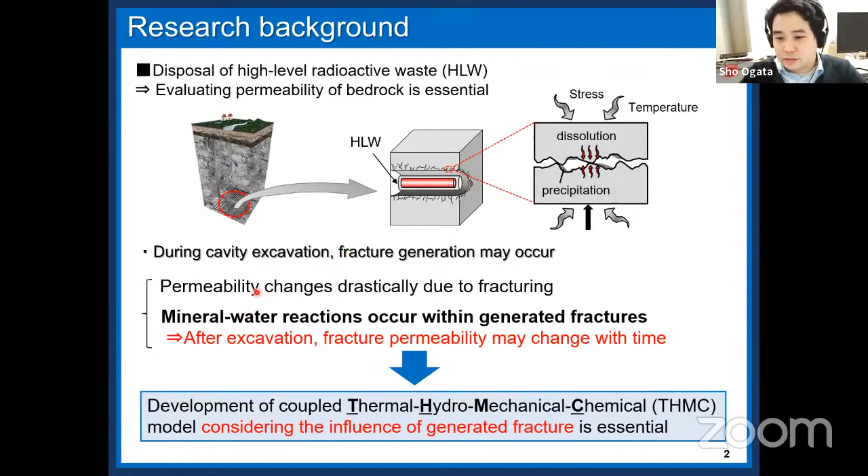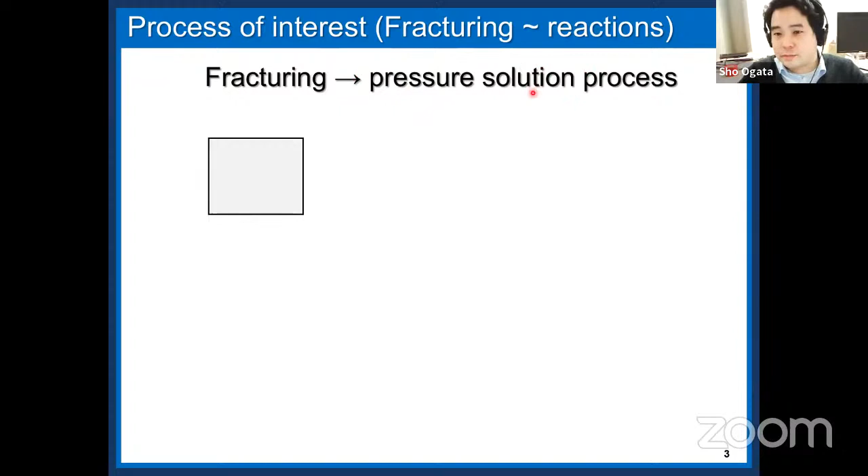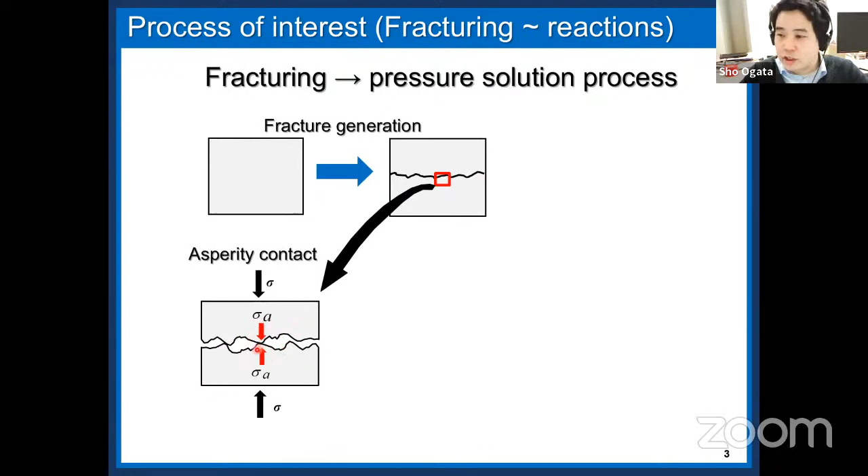Let me explain the process of particular interest in this study: a series of processes from fracturing to subsequent occurrence of mineral reaction. Among mineral reactions, pressure solution is introduced here. As shown in this figure, at first, a fracture area is generated due to cracking. After that, when high compressive stress acts on the rock, mineral dissolution occurs at asperity contact points in the rock fracture, and the fracture is gradually compacted by mineral dissolution over time. This phenomenon is pressure solution. When pressure solution occurs continuously, the fracture aperture decreases with time, as well as the permeability.

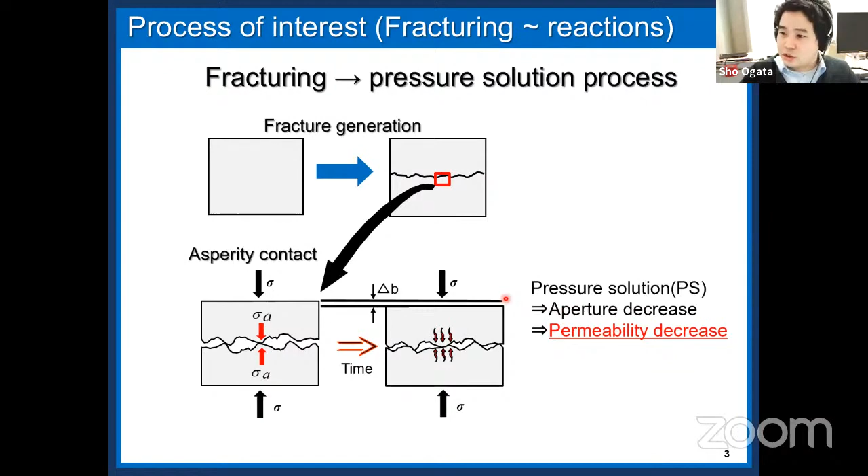So, for accurately predicting a series of permeability evolution processes during the geological disposal period of radioactive waste, the series of processes from fracture generation to subsequent pressure solution within generated fractures should be modeled and incorporated into the coupled THMC model.

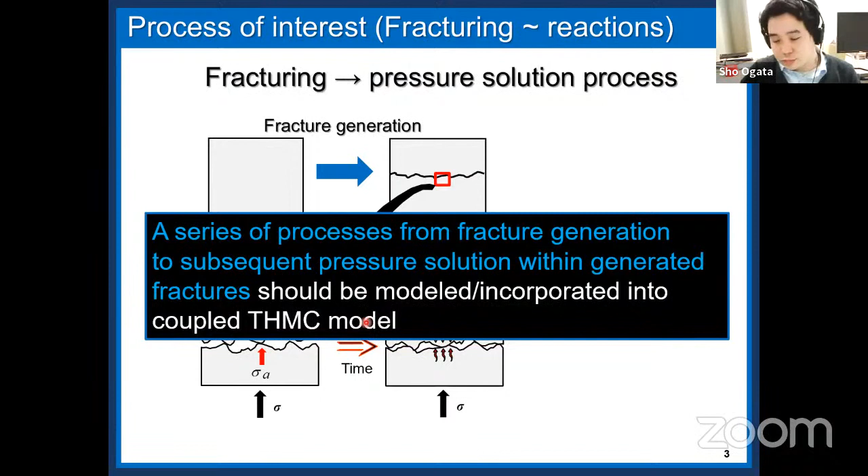Previously, many coupled THMC models have been proposed. However, almost no model can comprehensively describe the coupled THMC process, including fracture generation. For example, recently some models that can describe the coupled THM process, including fracture generation, were proposed. But the occurrence of mineral reaction influenced by fracture generation wasn't considered.

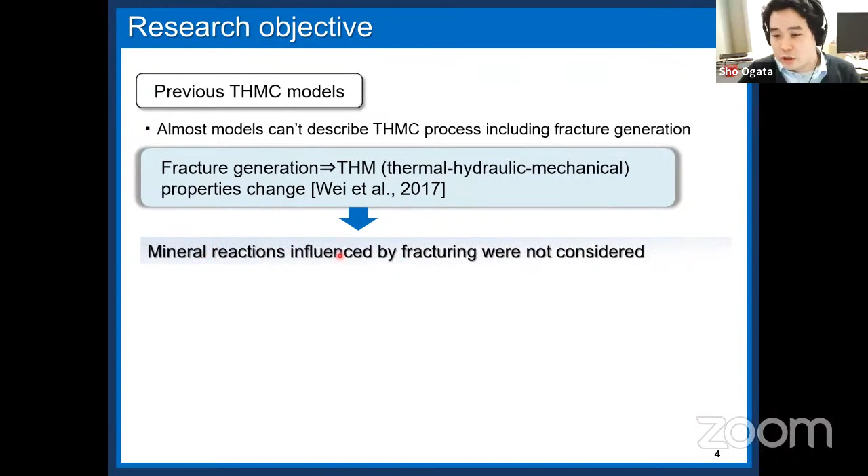So in this study, for predicting a series of permeability evolution processes, we developed a new coupled THMC model that can consider both fracture generation and subsequent occurrence of mineral reaction, such as pressure solution, influenced by fracture generation. And then, by using the developed model, we conducted long-term prediction of rock permeability change within a geological disposal facility of high-level radioactive waste.

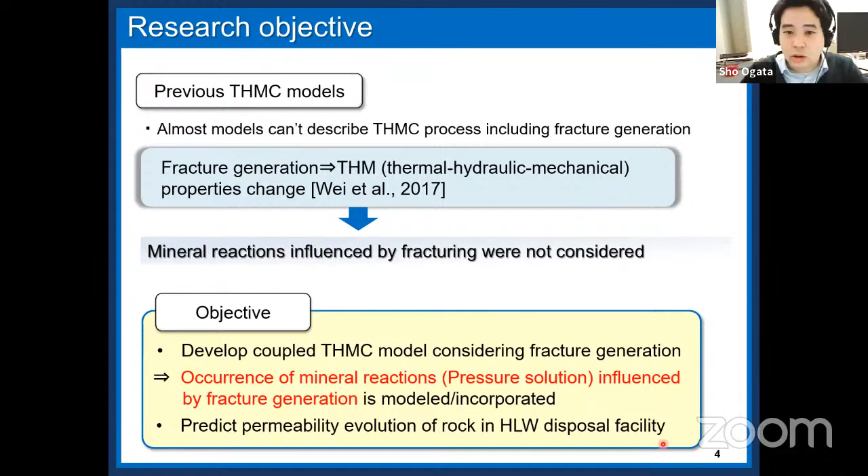From the following slides, some contents of this paper will be introduced.

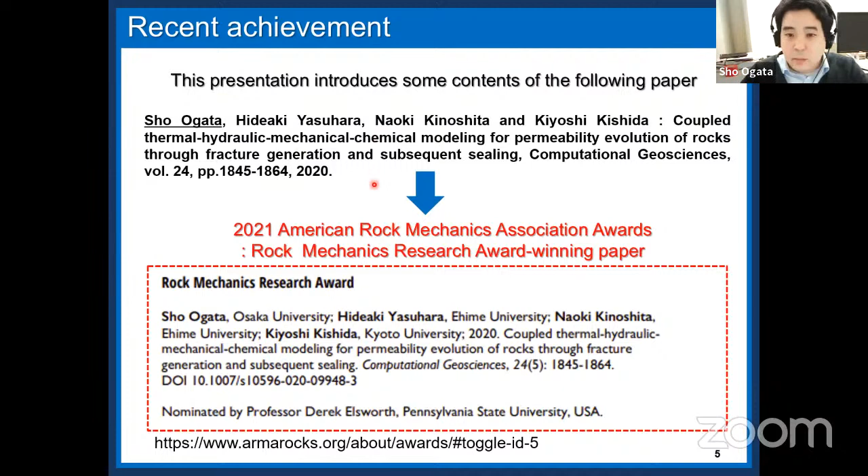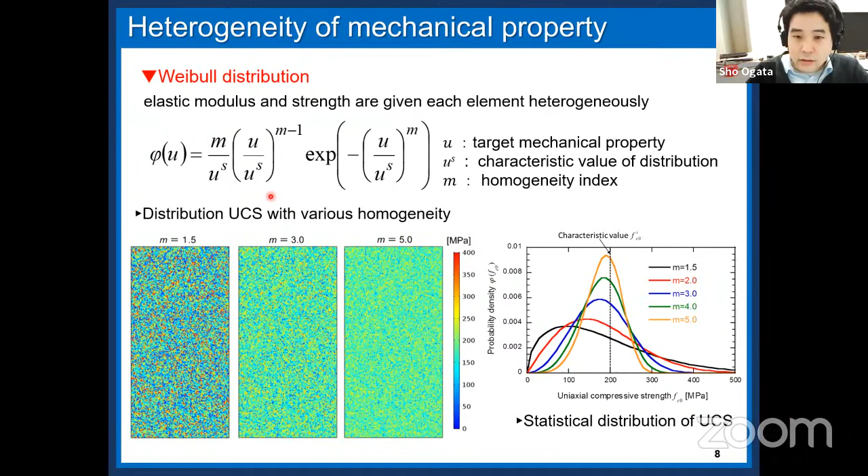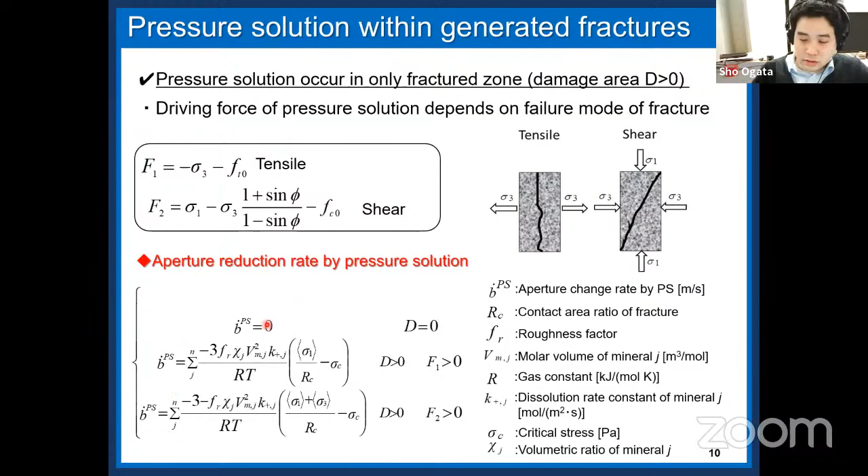In this equation, RC represents fracture contact area ratio, which means the ratio of contact area to cross-sectional area of the target fracture.

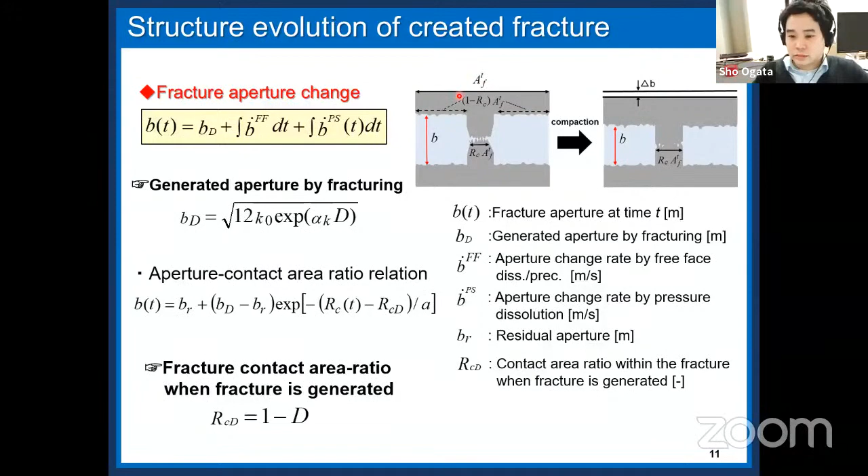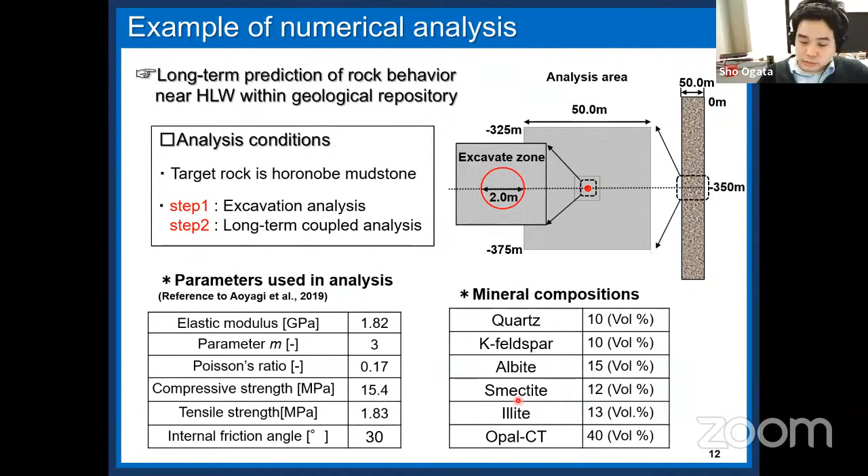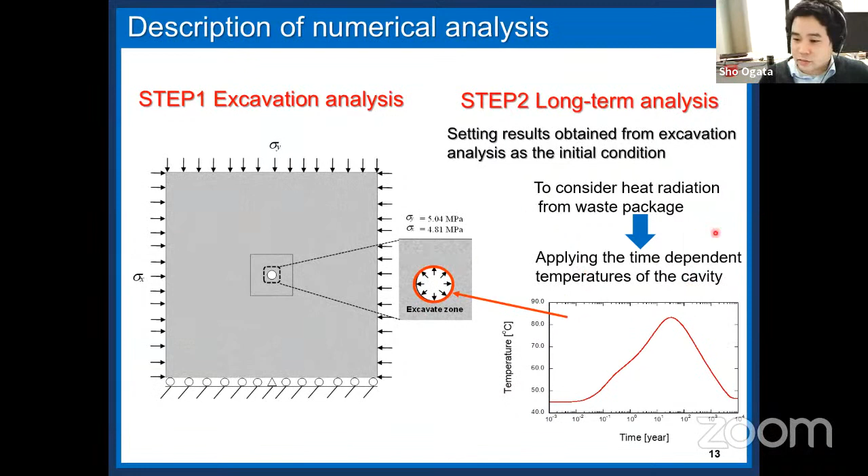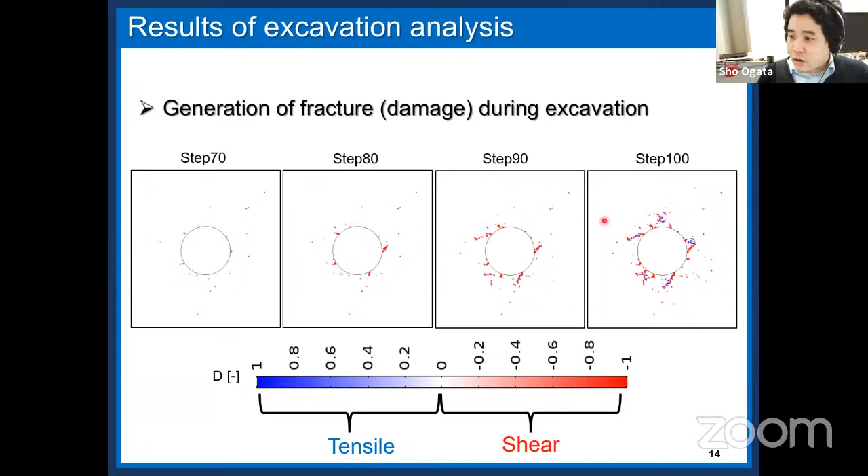From here, I'll introduce the numerical analysis results. At first, the behavior of fracture generation during excavation analysis is shown in this figure. Here, the blue-colored area represents tensile damage, and the red-colored area represents shear damage. It is apparent that fracture was generated around the cavity as the excavation step progresses, and shear fracture was more remarkable than tensile fracture.

This is an animation of the fracture evolution. You can see the gradual crack propagation with excavation steps.

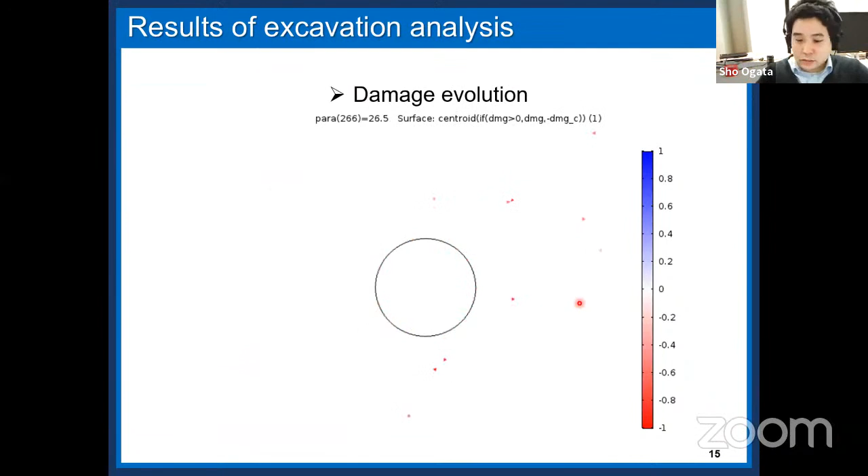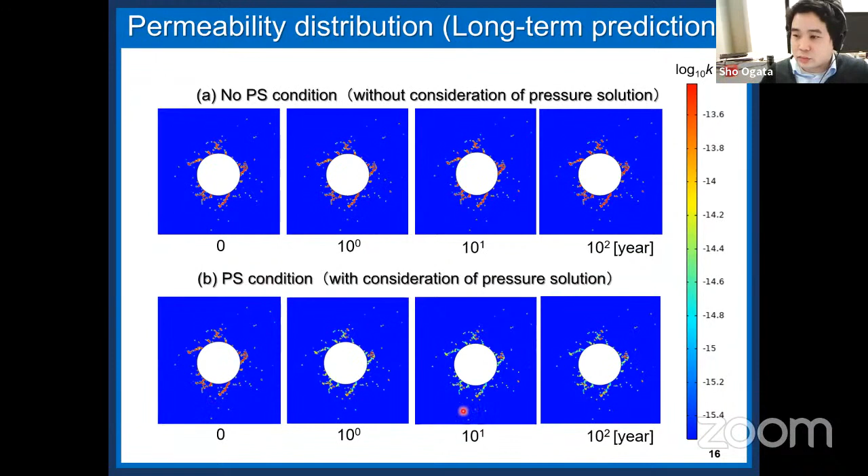This is an animation of fracture permeability evolution. You can see that the permeability in the damaged zone decreases with time due to pressure solution.

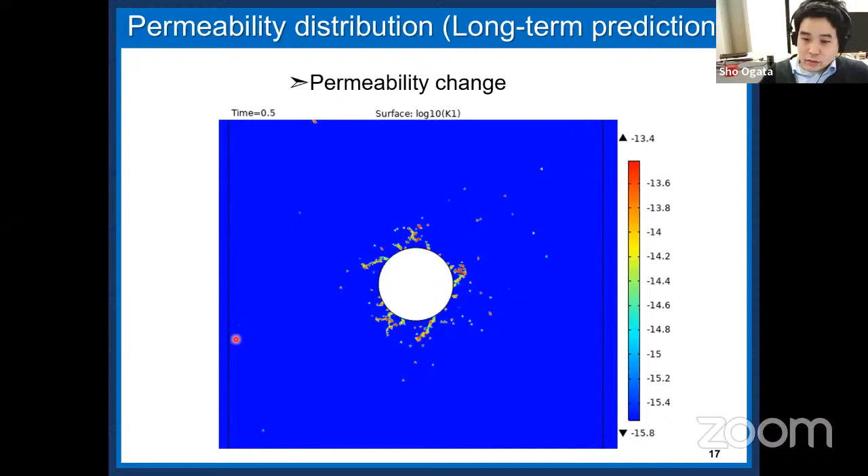Finally, conclusion. In this study, we developed a new coupled THMC model that can consider both fracture generation and subsequent occurrence of mineral reactions, such as pressure solution in rock fracture. Then, using the developed model, we conducted prediction of long-term behavior of the natural barrier.

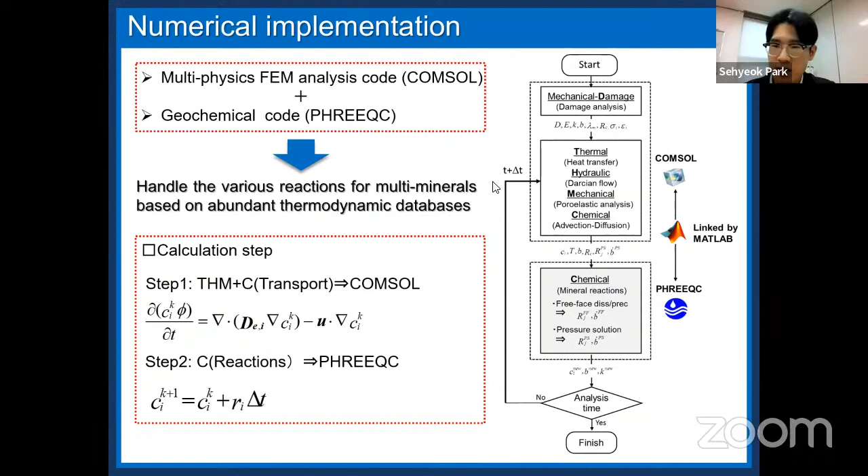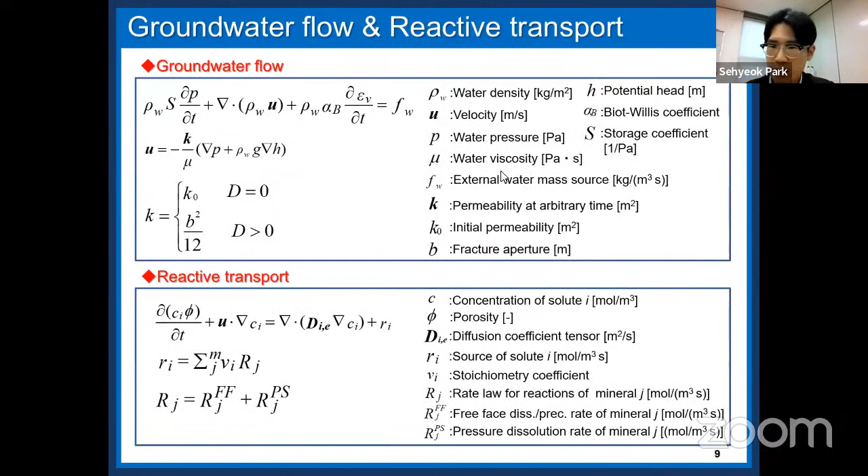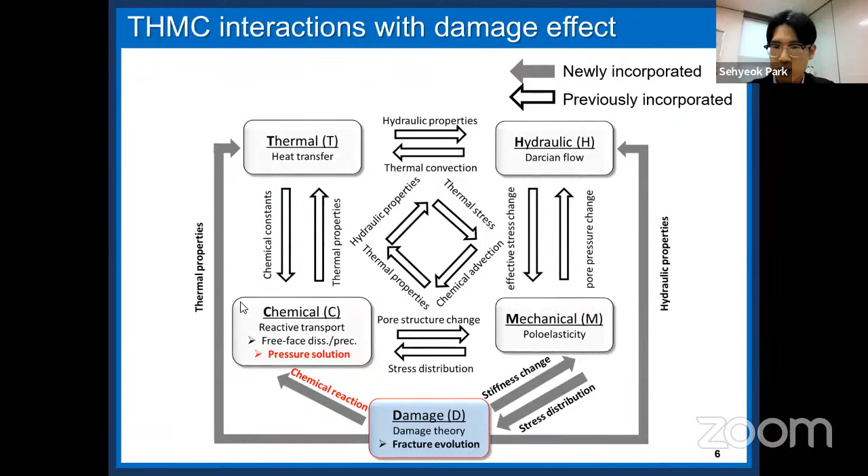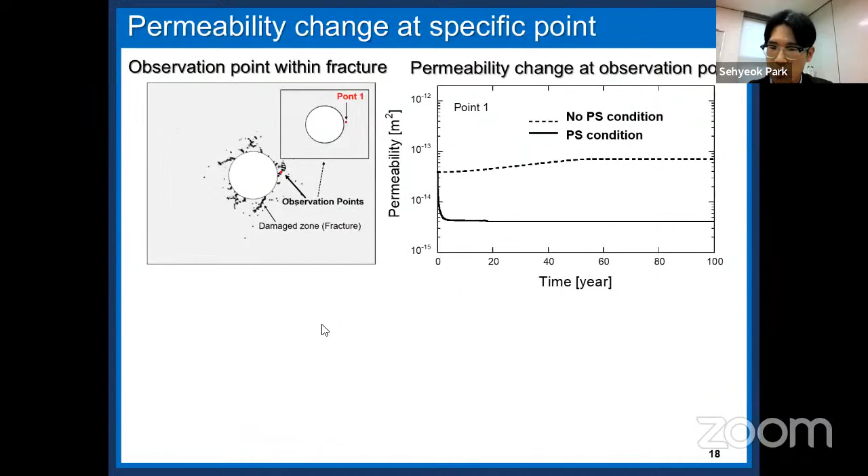Can I raise one more question? In case of TM or HM coupled problems, there are some well-known analytic solutions, so developers of new numerical codes can easily verify them. But in the case of THMC coupled processes, it's very complex, so it'd be very hard to find an exact solution to use as a reference for verification. Can you explain some strategy for verification of this code, or THMC in general?

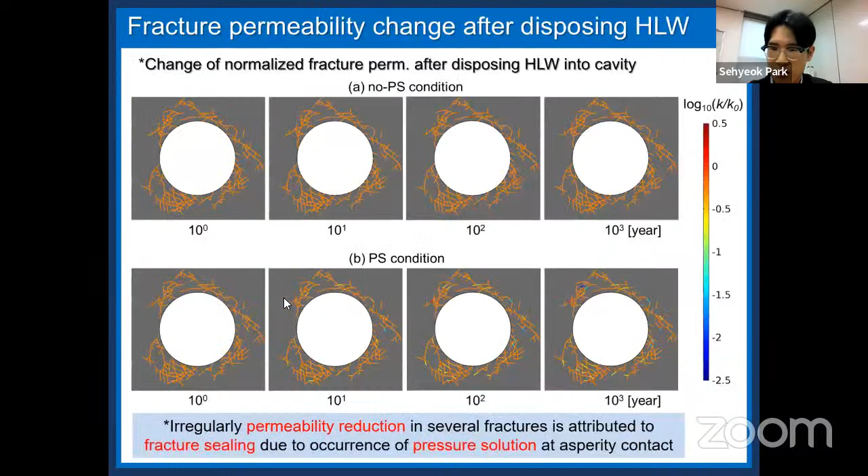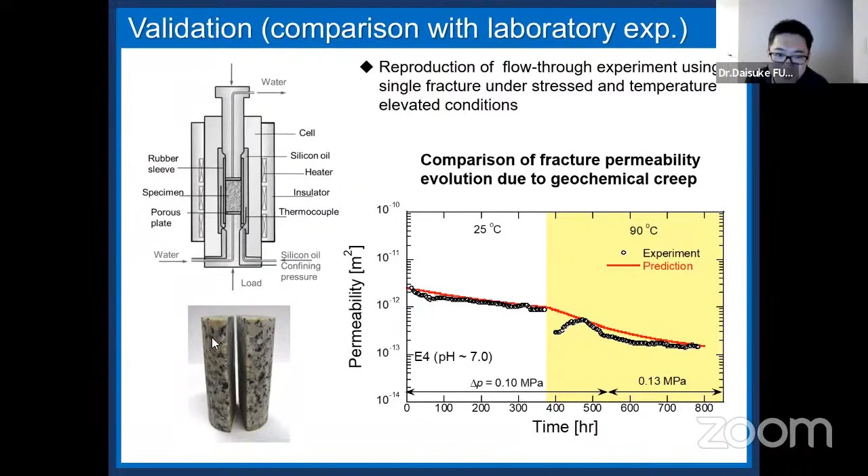Currently your THMC model is a 2D-based numerical simulation, but in actual rock mass, fracturing happens in a 3D manner, which I think complicates the problem and requires more development. So using 2D, do you think you can capture the real problem correctly, both qualitatively and quantitatively? How can you validate this? Verification can be done using benchmark problems for each component, but for real validation, how can you do that? I'm really interested in the validation process for this kind of very complex problem.

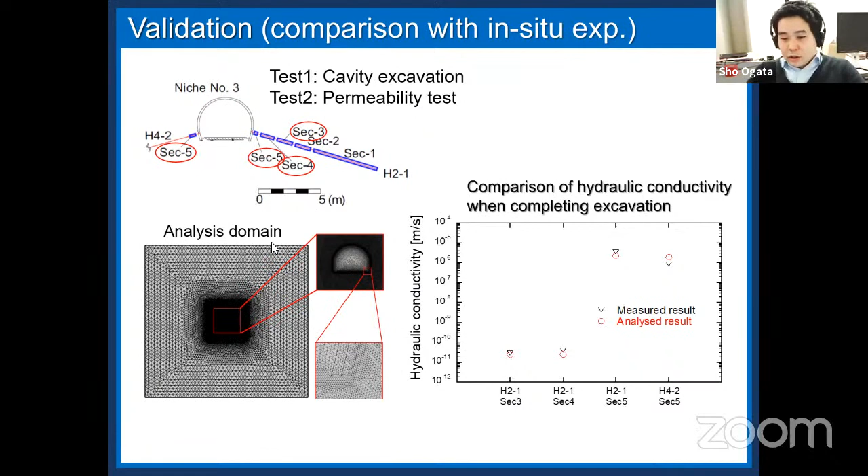Thank you for the question. My numerical code is currently a 2D code, but previously I compared an in-situ excavation test, a 3D in-situ excavation test, with the analysis result of the 2D code. By comparison, we confirmed that our 2D numerical code can reproduce the real 3D excavation process and permeability change process.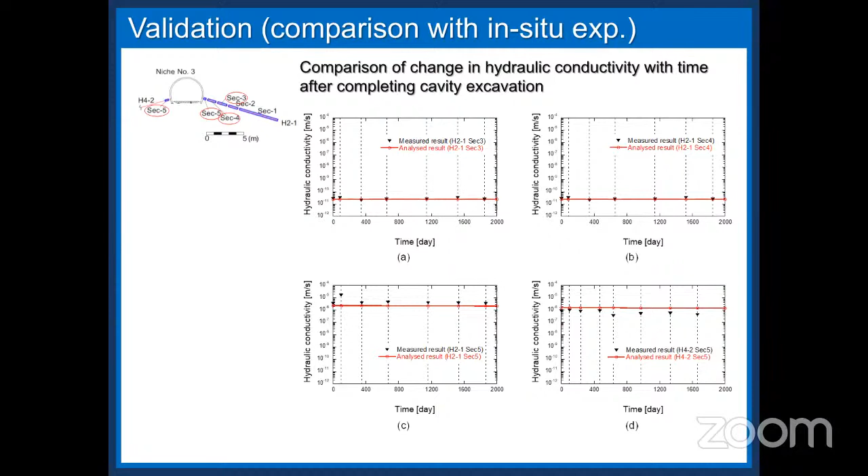Yes, thank you for the question. The other typical applications I think of are geothermal reservoirs — in this application the complex coupled problem is similar to the geological disposal problem. I think our code will be able to apply to geothermal reservoirs, and an additional application is carbon dioxide storage.

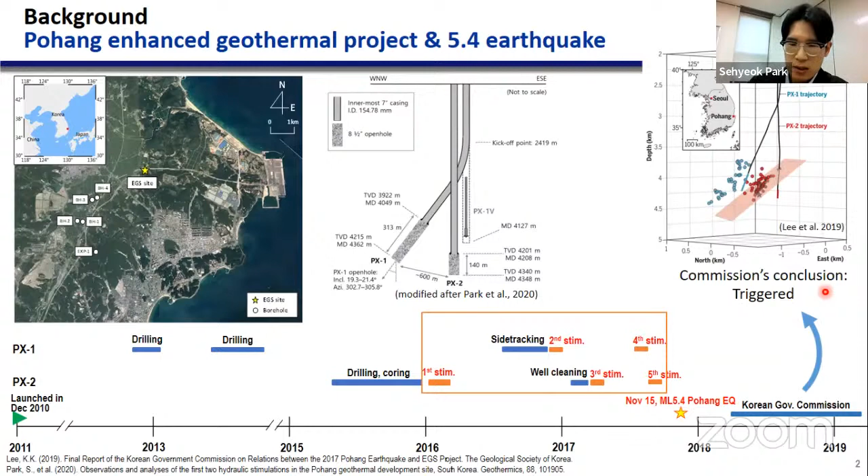But 2 months after the last stimulation, a magnitude 5.4 earthquake occurred at the site on November 15th, 2017. After the earthquake, the Korean government appointed an investigation commission, and after years of work, they concluded that the earthquake was triggered by the effects of seismic events induced by the hydraulic stimulations and geothermal activities at the site.

Similar to any other geomechanical behaviors, the hydraulic stimulation and induced seismicity are strongly affected by the stress condition of the rock mass of our interest. There were a few previously suggested stress models for the Pohang site, but as you can see from this slide, these stress models disagreed with each other in terms of both stress magnitudes and stress orientations. I thought that we need to continue more study and discussion on the stress model of the site.

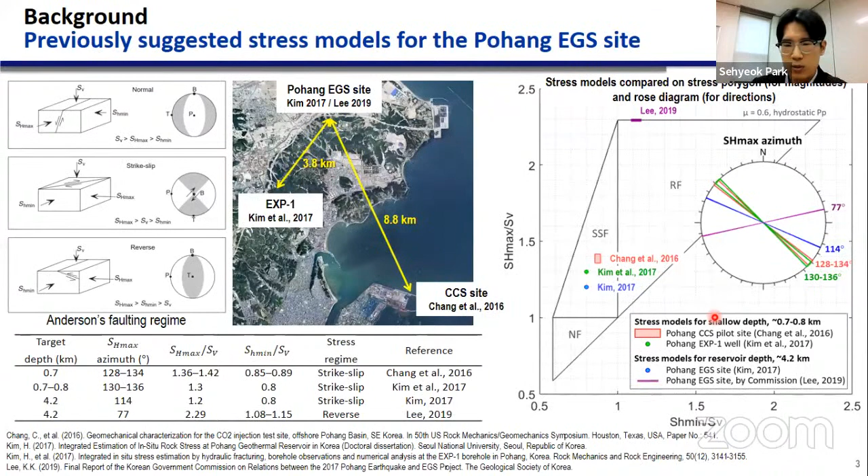In this regard, this study focused on suggesting a stress model of the Pohang site that best explains various field observations and also the occurrence of the Pohang earthquake.

From this slide, I will explain the stress indicators that I collected for stress integration in my study. For comprehensive stress estimation, the stress indicators were collected from various field observations. In PX1 well, lost circulation occurred at 4.1 kilometer depth and under the mud overpressure of 14 megapascal.

During the followed stimulation at the PX1 well, clear pressure peaks were observed at well pressure 15 to 17 megapascal. Those signals indicate that the same fracture was opened at consistent pressure levels, and compared to PX2 well, the pressure peaks were about 50 megapascal lower than that of PX2, which means that PX1 and PX2 had clearly distinct stimulation mechanisms.

Overall, these observations indicate that there was hydraulic shearing in PX1 occurred by a wellhead pressure of 14 to 15 megapascal.

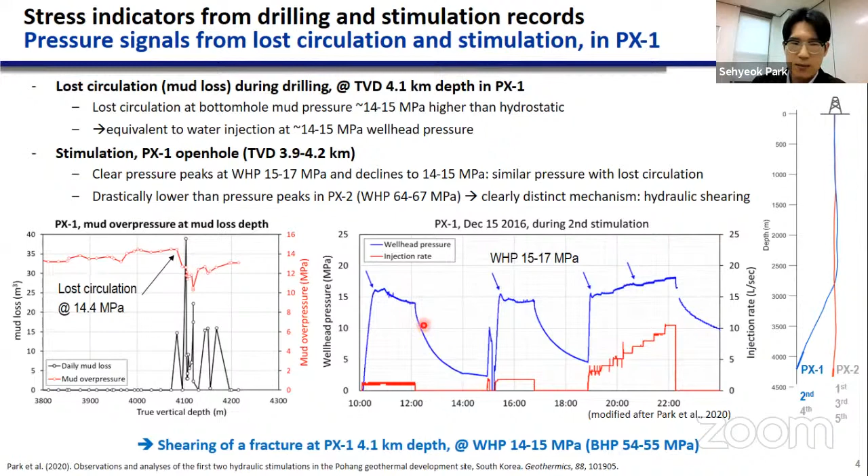In PX2 well, a considerable amount of lost circulation occurred at 3.8 kilometer depth. The government commission reported that this lost circulation was through the fault on which the magnitude 5.4 earthquake occurred, and seismic events continued for a month since the start of lost circulation. These seismic observations imply that the fault was sheared by the pressure of drilling mud.

There is another vertical well at the site, which is actually a closed vertical section of PX1, so called PX1V. The interesting point here is that there was no lost circulation while drilling the same depths in PX1V. The graph here shows the difference of bottomhole flowing mud pressure in PX2 and PX1V at the same depth of PX2 lost circulation.

This means that this 50 to 66 megapascal bottomhole pressure range is the pressure window to shear the main shock fault at PX2 3.8 kilometer depth.

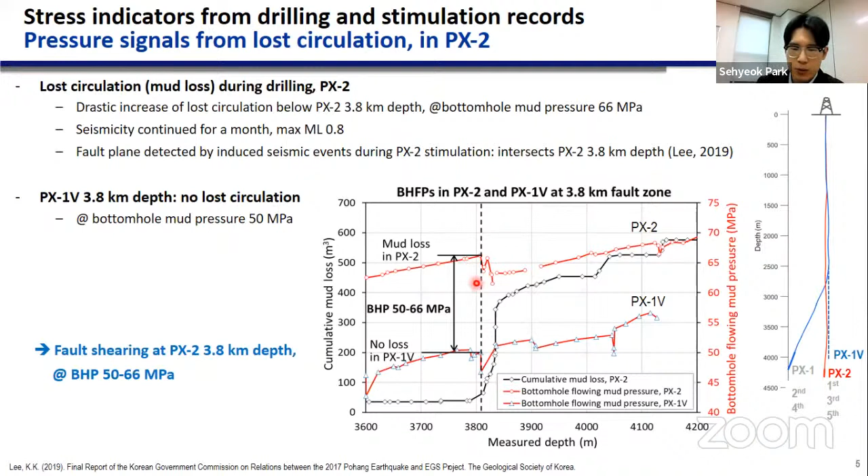There were also important observations during the stimulations at PX2. When a fracture is opened by fluid injection and closed during the shut-in period, a very unique pressure signal is observed at the moment when fracture faces are closed. This so-called fracture closure pressure is regarded as the normal stress acting on the fracture.

As no packers were used during stimulations, fractures with various orientations were exposed to water pressure, and the fracture with the lowest normal stress would have produced the most dominant pressure signal. In this regard, the fracture closure pressure in PX2 shown here can be interpreted as the minimum principal stress at the target depth.

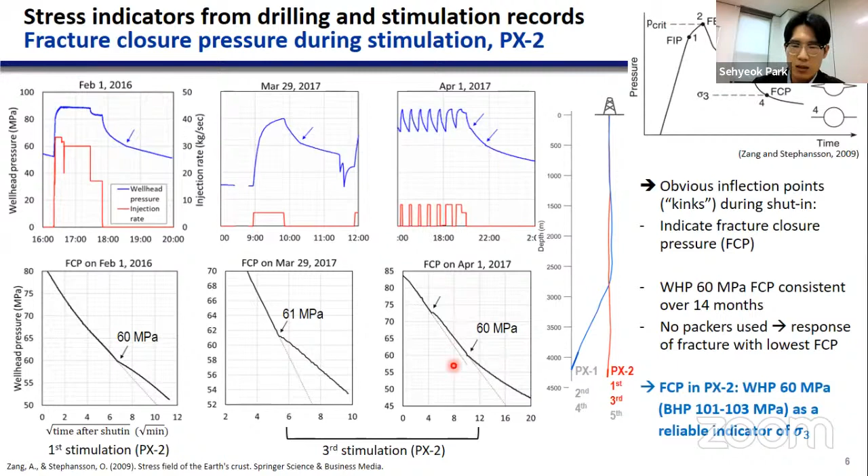The seismicity data also provides information on in-situ stress. Focal mechanism of an earthquake contains the information of fault plane orientation and also the slip movement direction. By using stress inversion of focal mechanisms, we can obtain the stress orientation and stress ratio that best explains multiple fault slip movements. The table here shows various stress inversion results for the Pohang site.

Interestingly, we can find that the results largely agree on the strike slip faulting regime and the stress ratio of about 0.87 to 0.89.

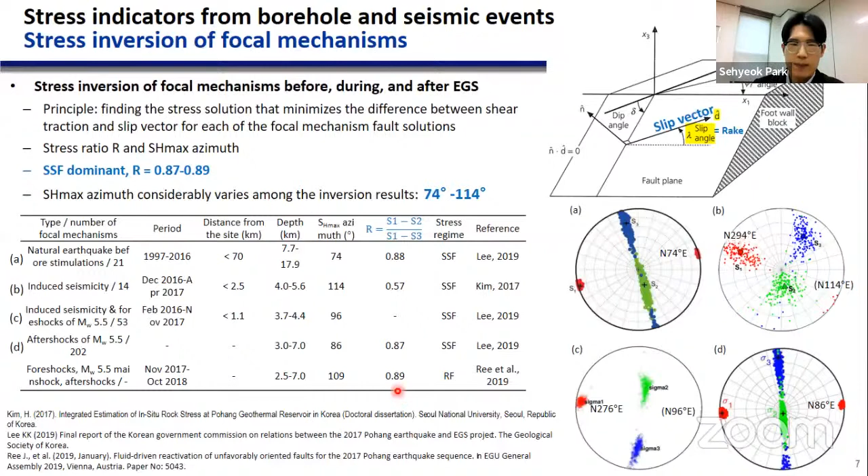The next stress indicator was obtained from the caliper logs. Borehole wall failure is frequently found from a well in a high horizontal stress condition. In Pohang PX2 well, both borehole breakout and washout are found from multiple sections of its four-arm caliper log data.

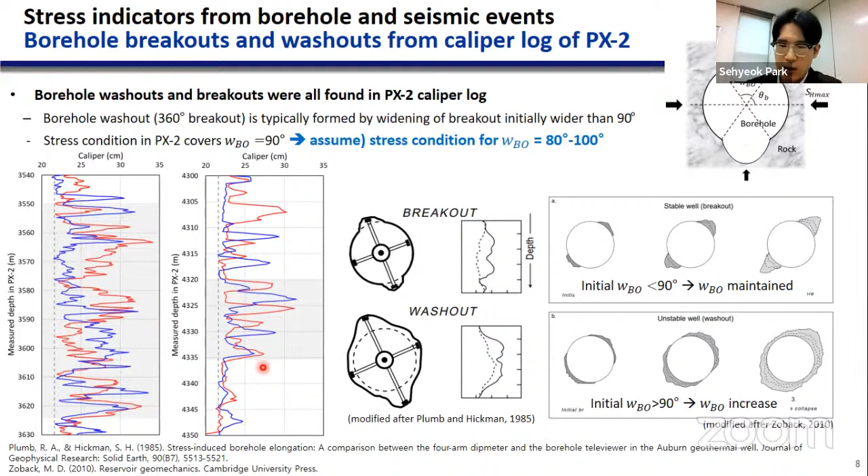In oil and gas industry, it is empirically known that the borehole breakout, initially wider than 90 degrees, will grow in width and could possibly transform into borehole washout. So from this empirical criteria and the observation from PX2, an assumption was made that the stress condition in the Pohang reservoir is in a range making the initial breakout width to be about 90 degrees.

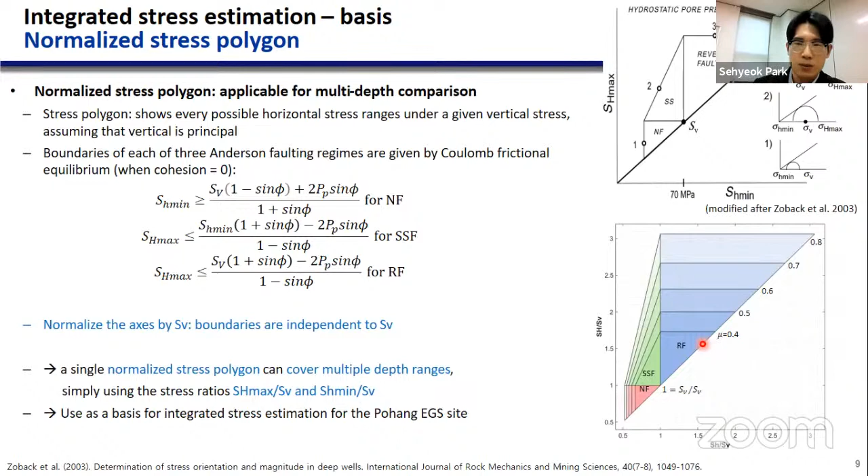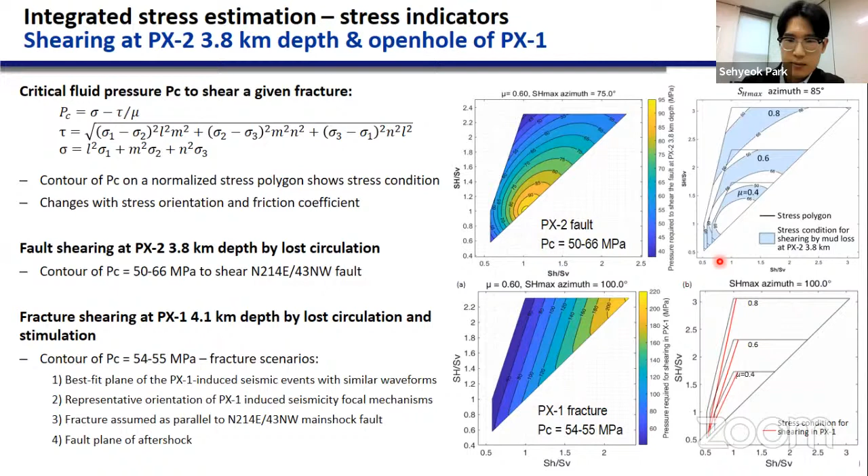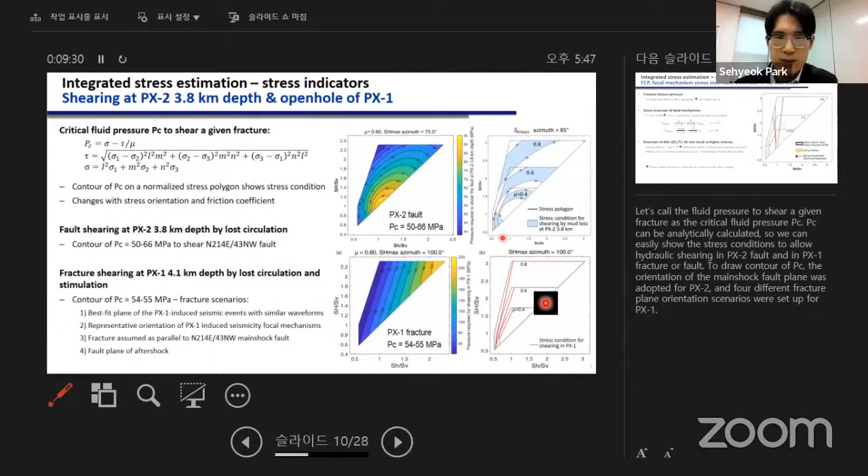Sorry, I think I have a problem in my presentation file, so maybe I should pause my presentation here for a moment. Can you share the screen again? Okay, wait a second.

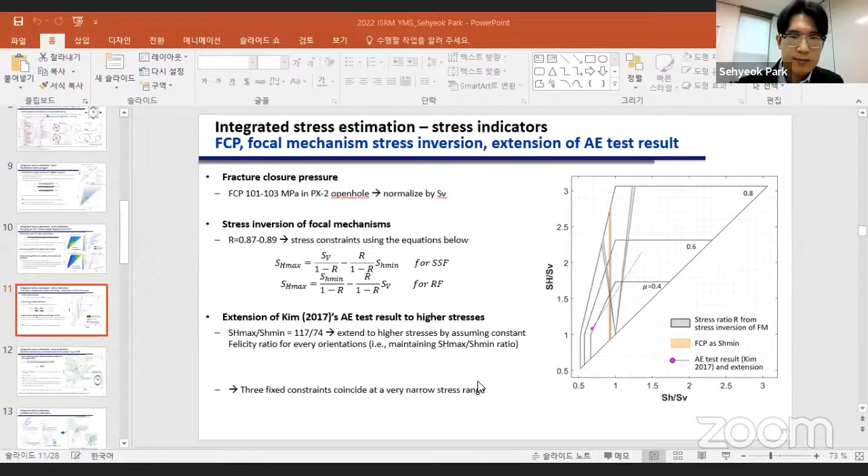Yes. Now can you see the screen? Yes. Okay, sorry. So I'll continue my presentation.

So the next stress indicators are shown here. The fracture closure pressure in PX2 and the focal mechanism stress inversion results are shown on the same stress polygon. These two stress indicators do not change with stress orientation or friction coefficient, and also they are very narrow on the stress polygon, so very helpful to pinpoint the matching stress condition.

As you can see, the stress ratio from stress inversion is shown in the gray shaded area, and fracture closure pressure is shown in orange. So this narrow area crossing both of the stress indicators is very helpful to narrow down the possible stress range.

What is shown in pink dot and gray line here is the extension of acoustic emission test results of the rock cores that we sampled from 4.2 kilometer depth of PX2 well. Although it was only used as a subsidiary indicator in this study, it locates very closely to the region where the stress indicators of focal mechanism inversion and fracture closure pressure cross each other.

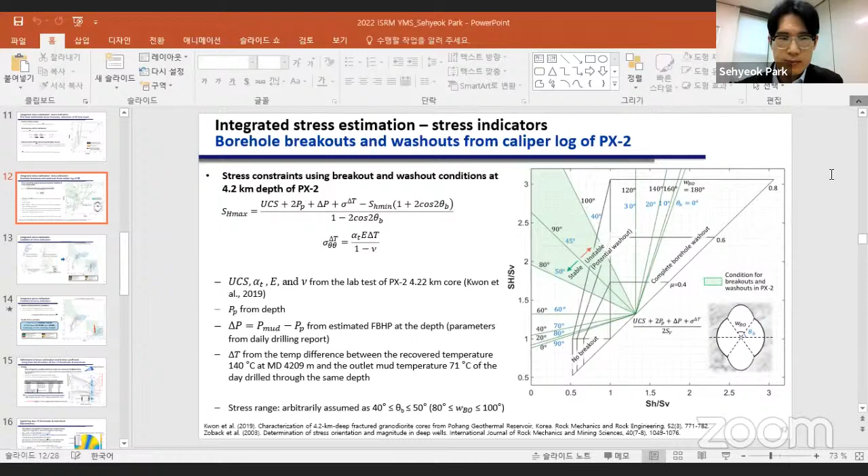As mentioned earlier, both breakouts and washouts were observed in PX2, and I assumed from that the stress condition would be a range that defined the borehole breakout initial width to be about 90 degrees. So the equation here shows the horizontal stress relation for a given breakout width. Using this equation, it is possible to show the stress condition to make initial breakout width to be between 80 to 100 degrees, and the result is shown in green shade on the right figure here.

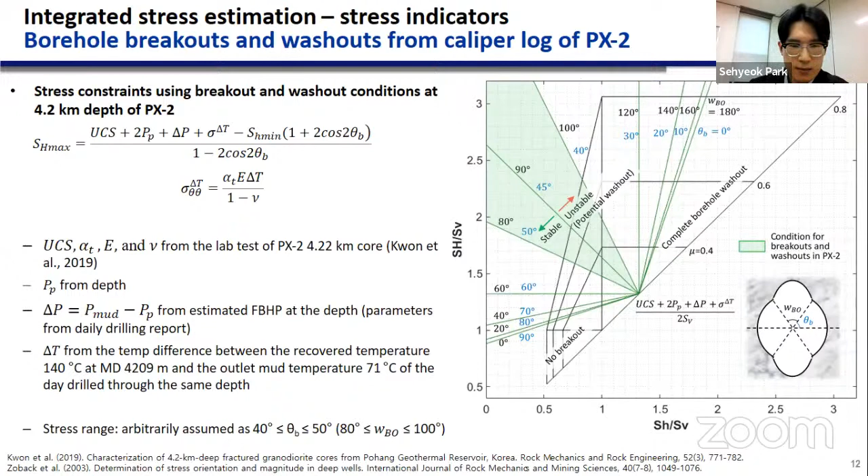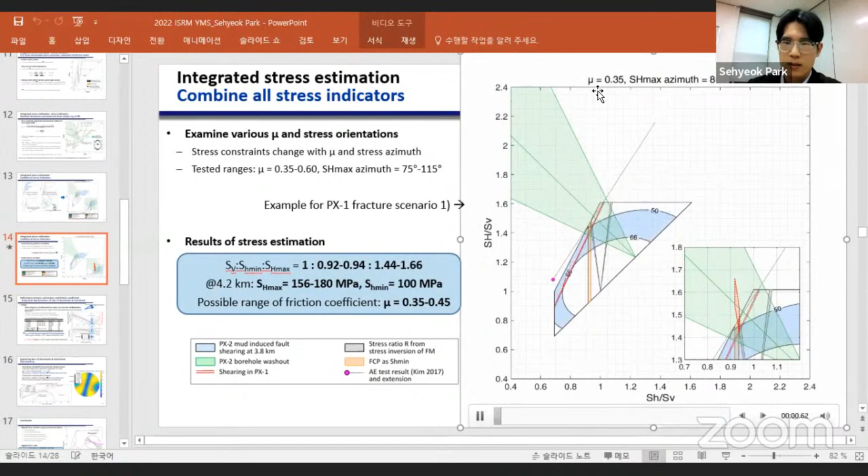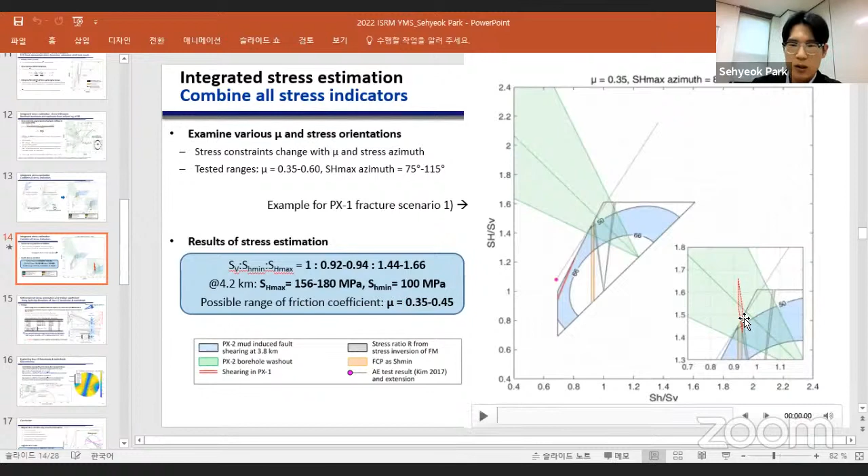What you can see here is an animation showing that as the friction coefficient and stress orientation change, the stress indicators change and create different conditions for their overlap. By performing several scenarios based on friction coefficients, stress orientation, and fracture orientation for PX1 shearing, I obtained stress estimated results for stress ratios—vertical, minimum horizontal, and maximum horizontal stress ratios—and also the possible range of friction coefficients to match all those stress indicators in the same region.

Next is the refinement of stress orientation and friction coefficients based on the stress magnitude and orientation determined in the previous step. Shown here are reference planes from focal mechanisms of foreshocks and the main shock, which occurred on the same day, November 15th, 2017.

By using those plane orientations and slip movement direction, we can calculate a theoretical slip direction and compare it with the actual direction measured by focal mechanism. The colored solid and dotted lines here show the angular distance between the actual measured slip vector orientation and the calculated slip vector orientation.

The red dashed line shows the root mean square of these 8 candidate fault planes. We can see that at a maximum horizontal stress orientation of about 101 to 110 degrees, or at 106 degrees, the root mean square is minimized. So we can determine or narrow down the possible range of stress orientation using this method.

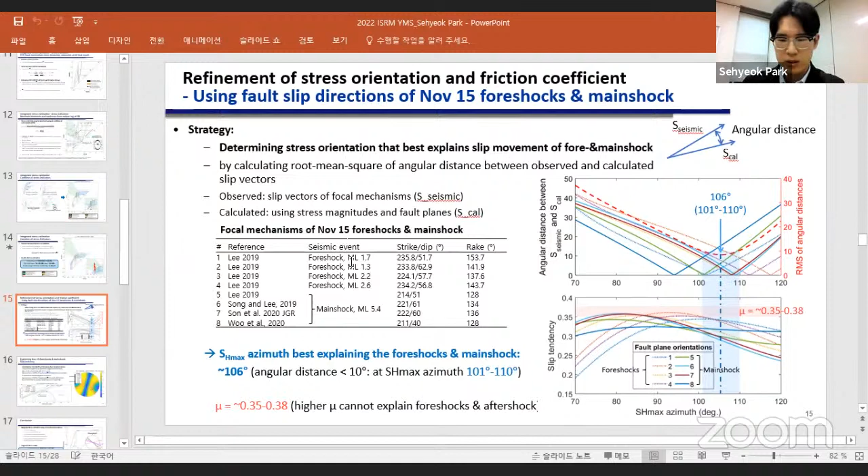Next, I demonstrated the slip tendency of these 8 candidate fault planes using the determined stress magnitudes, orientations, and the suggested range of friction coefficients. What you can see here is the stress slip tendency contour on a stereo net.

Shown here are Mohr circles with 8 different fault candidate plane orientations, and these triangular markers are from foreshocks. We can say that three of the foreshocks have very high slip tendency, almost critically stressed close to the failure criteria. Assuming those four shocks, occurring on the same day as the main shock, could possibly trigger the main shock, I think examining the criticality of those four shocks is more important than the criticality of the main shock.

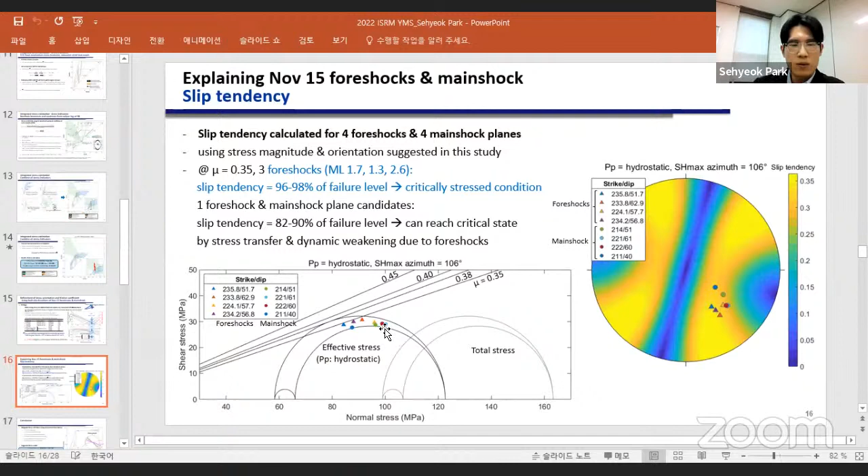This kind of Mohr circle can decently demonstrate the possibility of critically stressed states at the moment of the foreshock occurrences. So this is the conclusion based on many different stress indicators observed in the PX2 and PX1 wells at the site, and also the lab test results.

I combined all those direct and indirect stress indicators in a stress polygon to deduce a decent stress model that best explains all the observations and the seismicities—the foreshocks and main shock occurred on the same day as the 5.4 event. This is the resulting stress model.

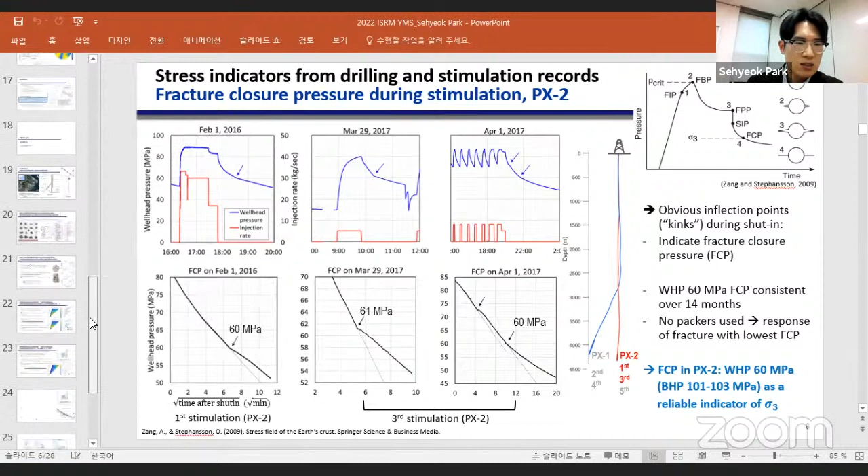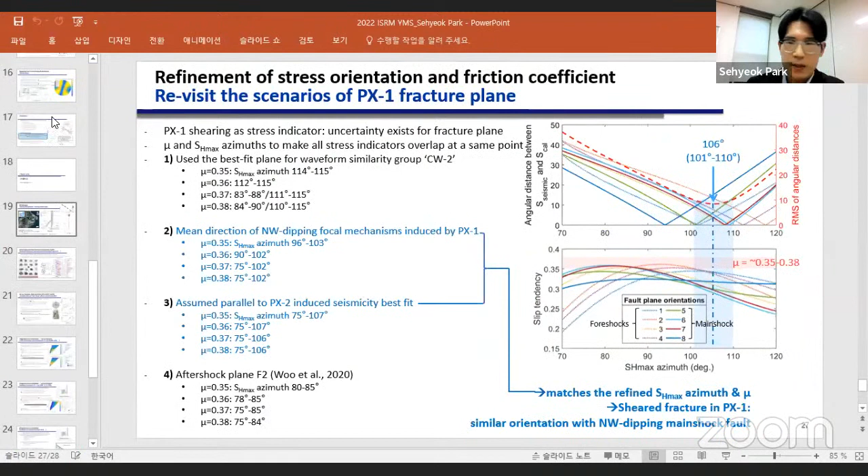And the second one is about assuming the critical stress state. From this animation that I showed, I determined the matching stress region by combining multiple different stress indicators, and it resulted in a friction coefficient which is quite lower than the typical range known as the Byerlee slope, meaning that friction coefficient of typical rocks ranges from about 0.6 to 0.8. But from this combination, we can only deduce friction coefficients as low as around 0.3 to 0.4. This much difference in friction coefficients results in a huge difference. So that was the second important reason.

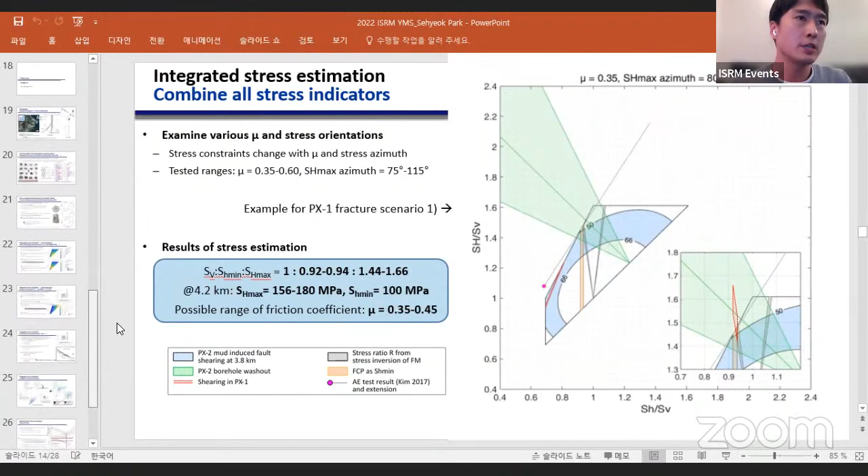Okay, thank you so much for the additional information. Is there any other questions or comments?

I have one question. Going forward, what do you think they would have done differently to avoid this happening? You mean the earthquake? That's right. Obviously, there is going to be more fracturing in the future. What are the learnings of these studies that can be used in the future to avoid something similar happening?

Although this study is not focused on the induced seismicity mechanism itself, I think this Pohang event was a very unprecedented event, and in terms of the relation between injected volume and earthquake magnitude, it was very different from other induced seismicities before Pohang. Because of that, as I know, this Pohang case is raising many following researches about the mechanism of induced seismicity and also the prediction of seismicity magnitudes from operational features.